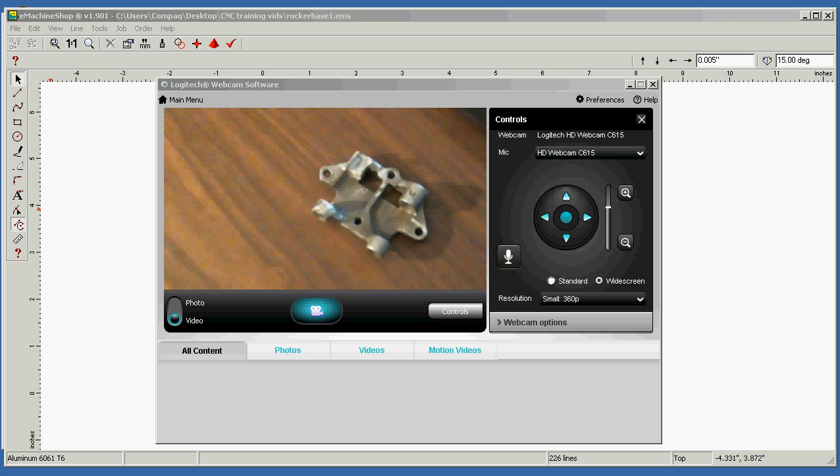Want to get back into the drawing of the drawings I need to do to produce the G code to make this part. Once again, I had to switch computers and operating systems and everything. I love Windows 64-bit, you know, nothing runs in it. So I got another computer now with Windows 7 in it with 32-bit, and hopefully all my software is working good now. I couldn't get D2NC to work correctly in 64-bit Windows 7. So, at any rate, that's my problem.

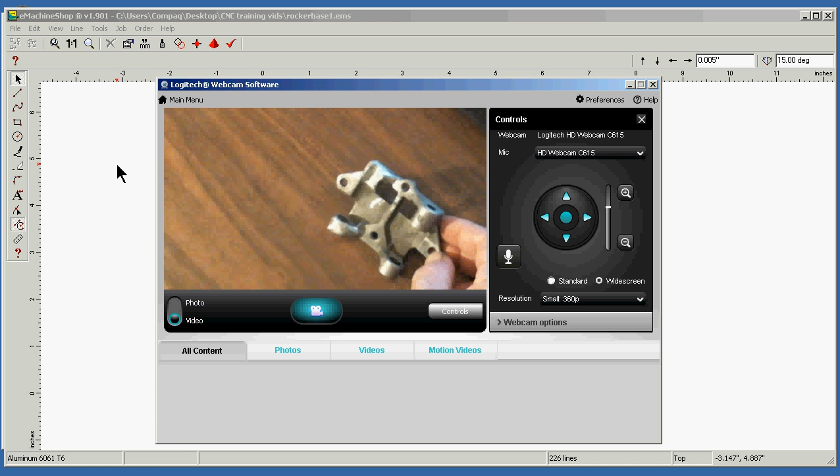What we need to do now is actually determine how we're going to machine the part so we can produce the right drawings to machine the part. There's a few things to keep in mind when we're doing it. One is the tool actually has to travel farther than the distance of the part to cut these things out, otherwise you leave radiuses in the corners. So you can't use the actual drawing of the part to do that.

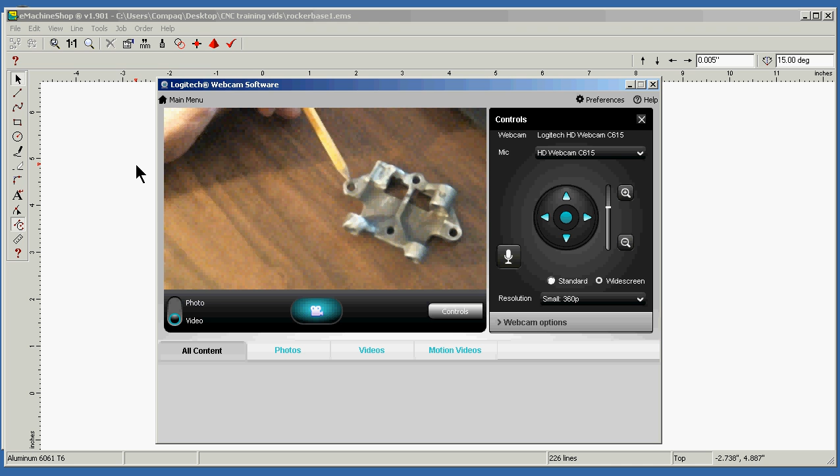The first thing I would want to do is actually drill the bolt hole pattern. The way I've decided to do this is: the first G code I'll do is to find zero, drill the 4 holes so I can make a fixture plate to actually hold this, because I have to keep switching directions and machine it from this way, machine it from this way, machine it from the top, and machine it from the bottom. So the first G code drawing that I'll do is to actually drill the holes. Then once I have that,

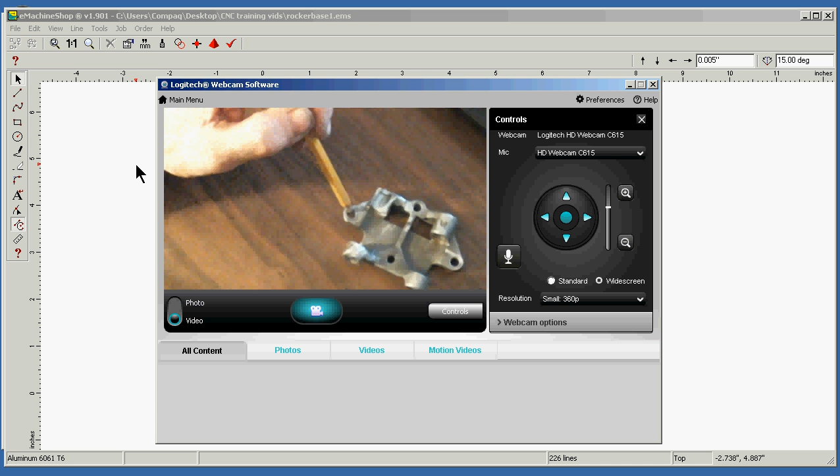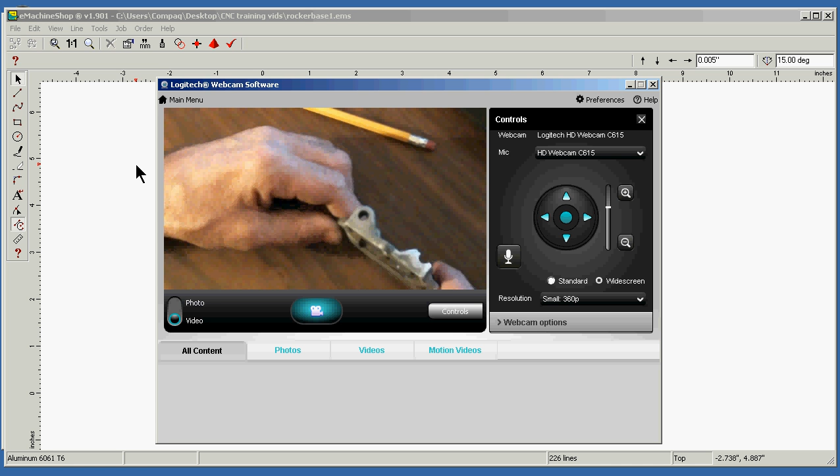I'm going to tap these holes to start with so that I can bring the bolts in from the back side. I have about a quarter inch of thickness here that, if this was bolted down from the back, won't interfere with any of the top machining, and won't interfere with machining it from this side or this side. Then with the same bolt holes and fixture, I'll make 4 standoffs, turn the part around, and then bolt it to the fixture from this direction, and flip it up and machine the back side. So the first G code thing I would do is the bolt pattern.

The second drawing I would need to do, let me see if I can get this back in view here, is to actually come in and take this entire section out this way, all at the same height through here, and I have to go beyond the actual end of the part, so zero will have to be sitting outside the picture, outside the actual part drawing. Otherwise the cutter won't go beyond zero.

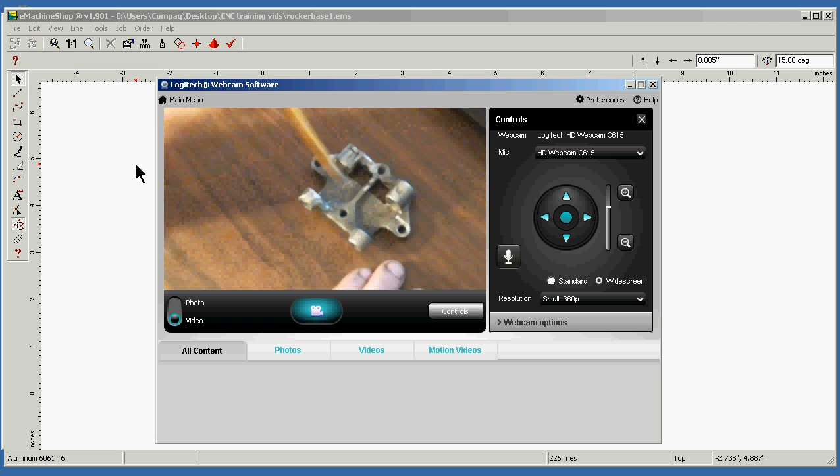Next one is the pass. In that same drawing, the pass will come through here at this depth, so it will take the bulk of the material out of the part in the center going this way and the center going this way.

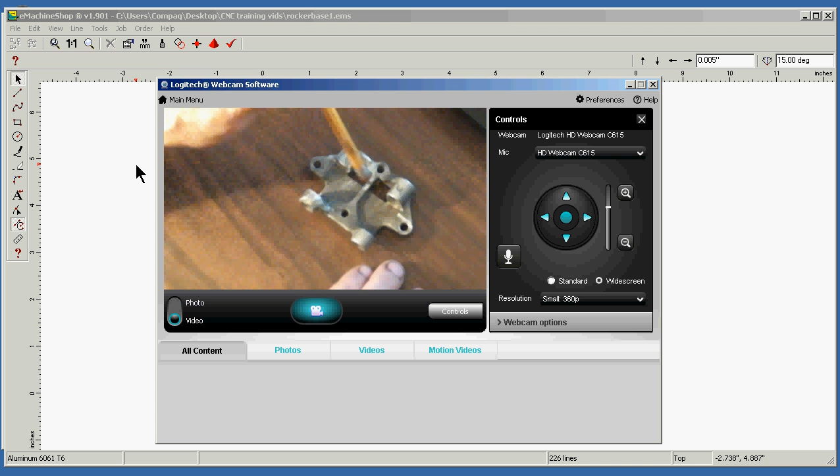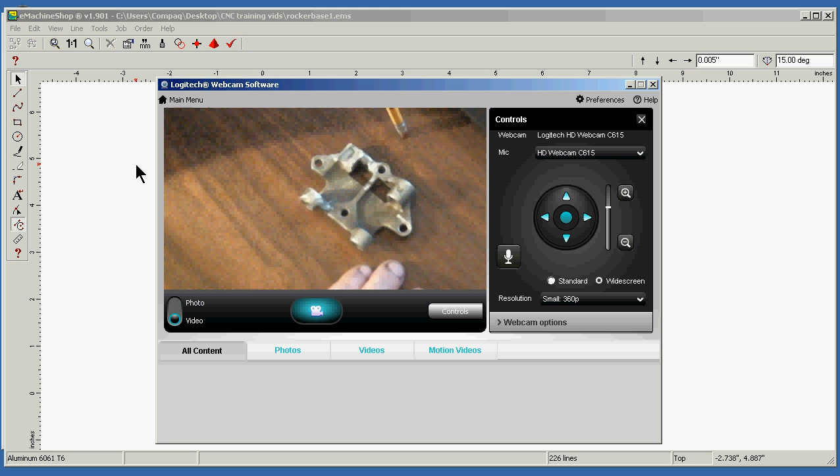Then the next drawing I would do is to produce a G code to take out this pocket, and these 2 holes. At that point, I've got all the geometry for the top surface actually done. These are square, of course, at that point, but they'll round off when we actually stand it up to machine it. So we've taken out the center part, we've taken out the cross part, we've taken out the 2 holes and the 2 pockets. Then, while it's on the fixture plate still, I would stand it up this way.

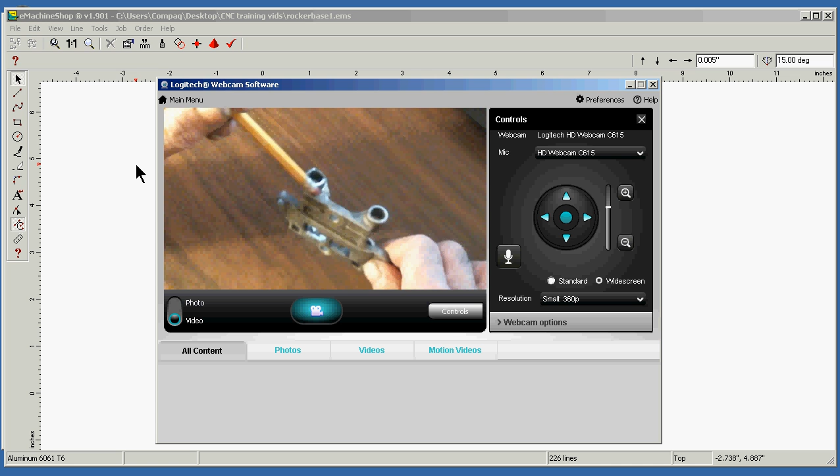Then I need to use this drawing, let me tip it up here. The first drawing, there'll actually be 2 drawings in this one. The first one will take this out to this depth, but this round area actually extends in, as you can see, down in here. So it'll take 2 different drawings to do that, because the first drawing is actually a full complete round circle. The next drawing will follow this contour and come in and go square across the bottom. Hopefully this is making sense.

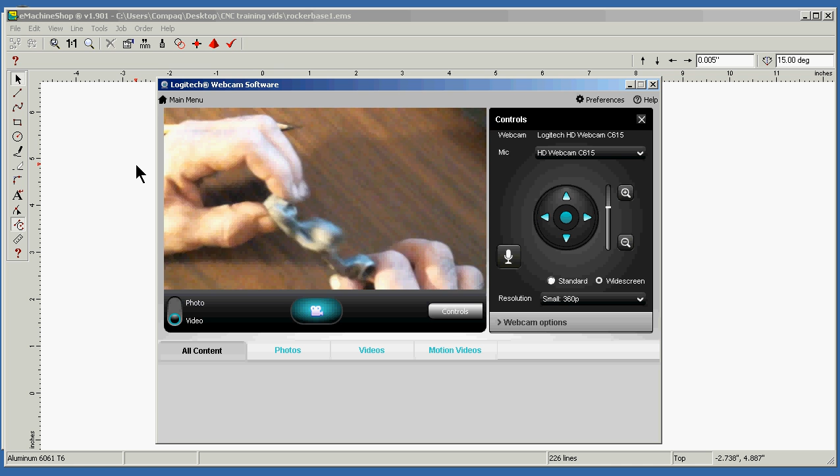Then the next drawing I'll need to do is flipping it over. This one's, once again, two different drawings. This one will have to come into a depth of right here, that's probably hard to see. Oh, there. Depth of right here, to go completely around this.

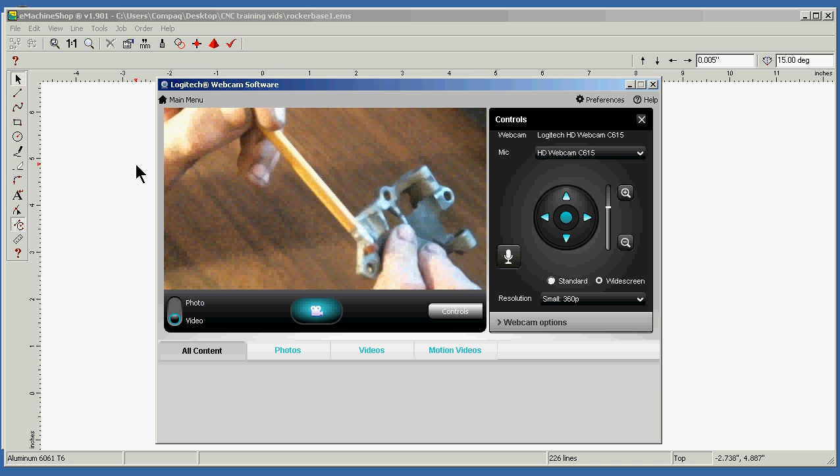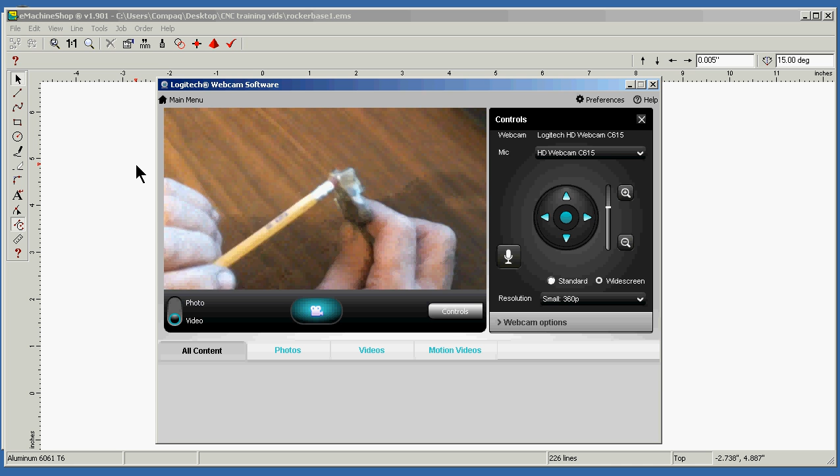Then the next drawing will have to come into a depth here, which means it will have to come around this radius, all the way out, back over, and then across the entire bottom this way, below this level. Because this level, if I can get this right in the cam, extends further than the end of this round section. So there'll be two drawings for this side that have to be set for different depths and different shapes.

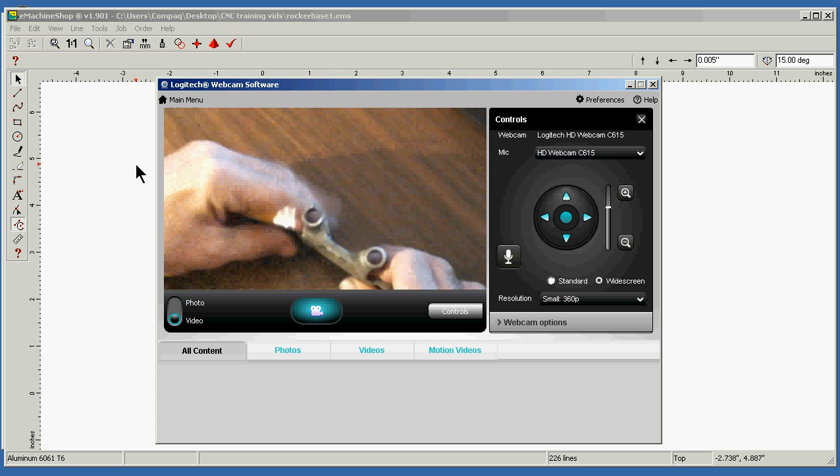Once those three sides are done, now we actually have the rounded surfaces. In this top drawing, I will drill these two holes. I will not try to size them or anything at that point in time.

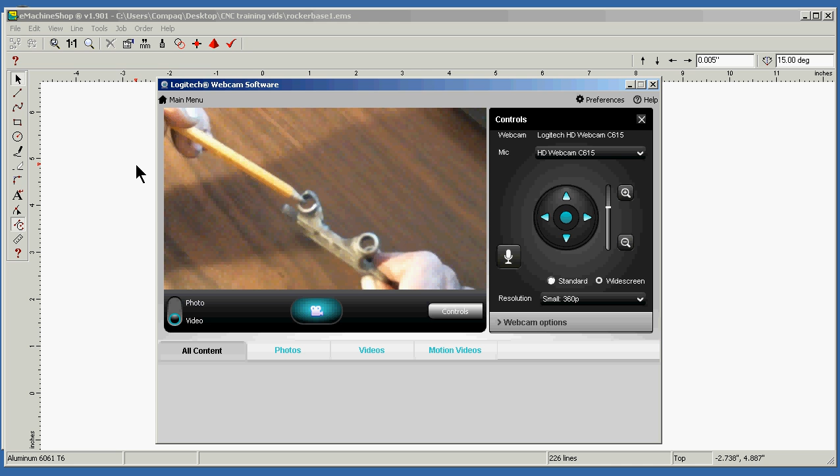I just want to find their location in the drawing, and I'll probably just center drill them. This motor is still put together, so I don't know the exact size of this pin, and that would be something I'd have to do after disassembling the engine, miking the actual pin that goes in there. The original motor used two little tiny C-clips to hold this pin, and the hole is actually smaller on this end, so it just has a flat bottom in it.

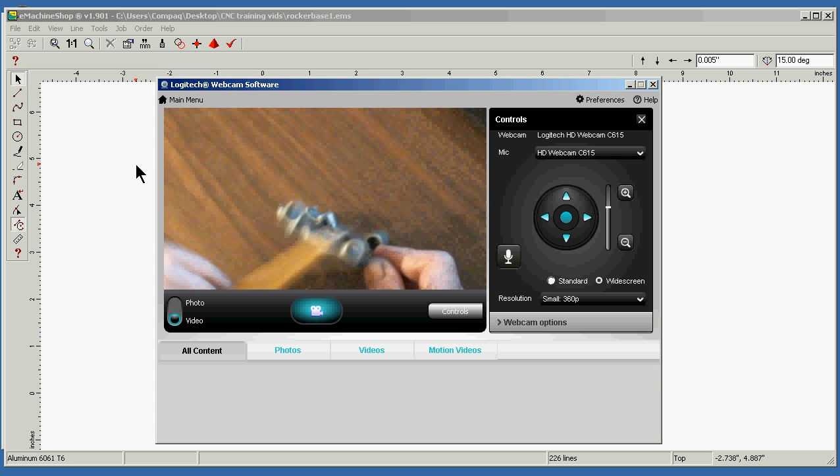I did it differently. It was just easier, instead of cutting this inside snap ring groove, to drill from the top and put roll pins in it. It's just something to keep this from moving back and forth. So it's easier to just put a roll pin here and a roll pin here and ream straight through.

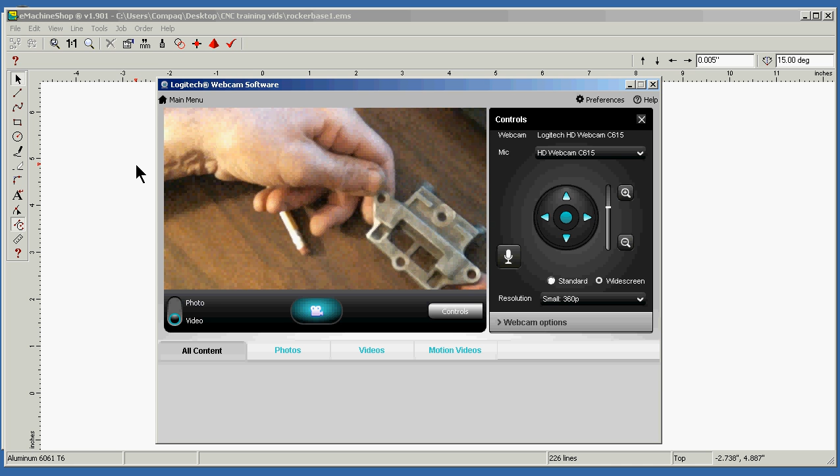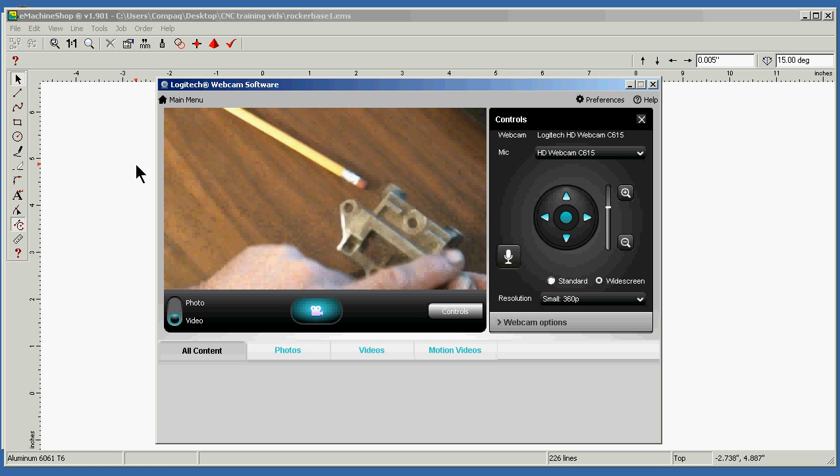As far as the bottom, once that's completely done, this will go back on the fixture plate. I'll make 4 standoffs, or I can just make an X-shaped block with 4 holes through it that's perfectly level, bolted to the fixture plate from the bottom. It has to bolt from the bottom because I need to machine the surface, so I can't have bolts here. Then all of the rest of these shapes will be milled into the bottom, and it's completed.

So let's start with the first set of drawings. One of the things I'll show you in the drawing is that I need to move my 0,0 point in all of these.

The reason I want to move it in all of them is, if you watch the previous videos, to do the G-code for the drill locations where it steps and goes to the next point, the next point, the next point, you have to have your first circle with its center where this square would be.

If you don't, the software, when it's set to only look at circles for drilling, will probably pick this circle right here as its starting point, choosing either the lowest or the farthest to the left. One of these two circles it's going to pick as a starting point, and that's not 0,0.

So that drawing will have to have a circle right here. I put these in since the last video. I realized I was changing things, and I wanted to mention that these are the actual 0,0 points on this drawing. This one here is actually in the wrong position, because you always want 0 from the original starting point.

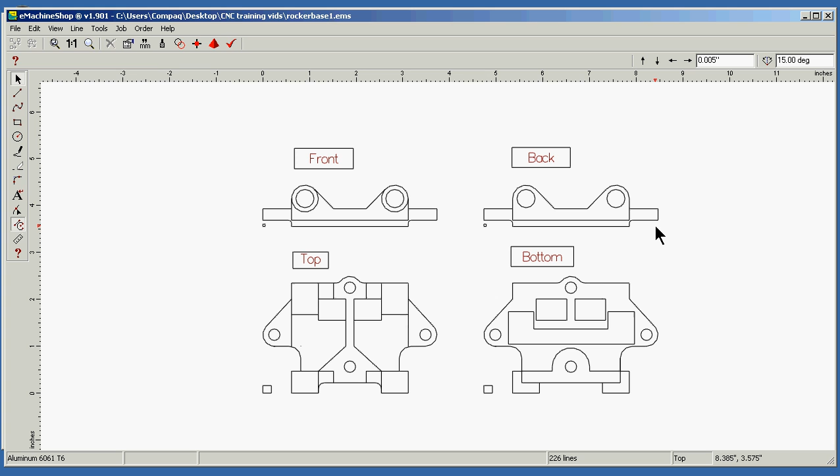This view here actually is correct. Its 0 point will start here, same as this one. But this one, when we flip it over, our original 0 point for X and Y is over here. So I'll need to move these two so that I'm always starting from the same 0 point.

So I'll go ahead and do that first. Let's select the area here and then zoom to the area. Zoom to selection. Alright, click off of it. And I'm going to draw a line from here, holding down the control key.

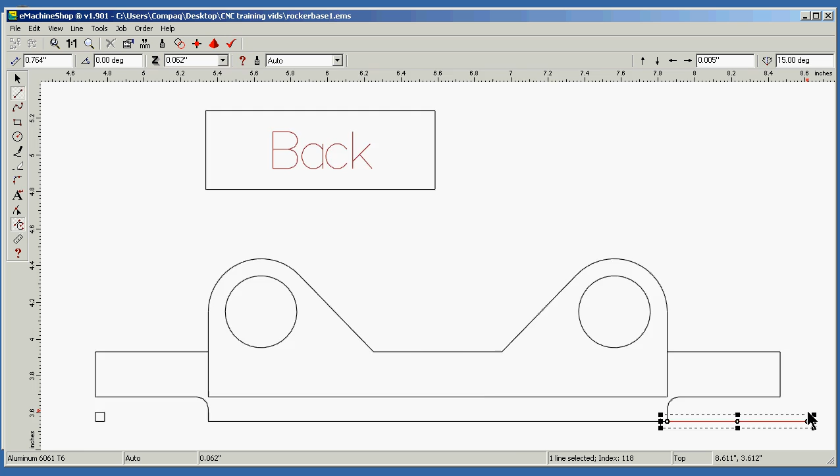I got a new keyboard too, so I have to find out where the keys are. I'm going to hold down the control key so the line stays straight, just pass through here and drop it. Same thing, I'm going to pick this one up at the top here.

Start there, holding the control key, and just drawing those two lines. Pick this little square here and bring it a little closer into view, then drop it in this section.

I'm going to zoom to the actual little square there. I want to select an area and then zoom to that, so we're going to say view, zoom to selection. I want to grab this.

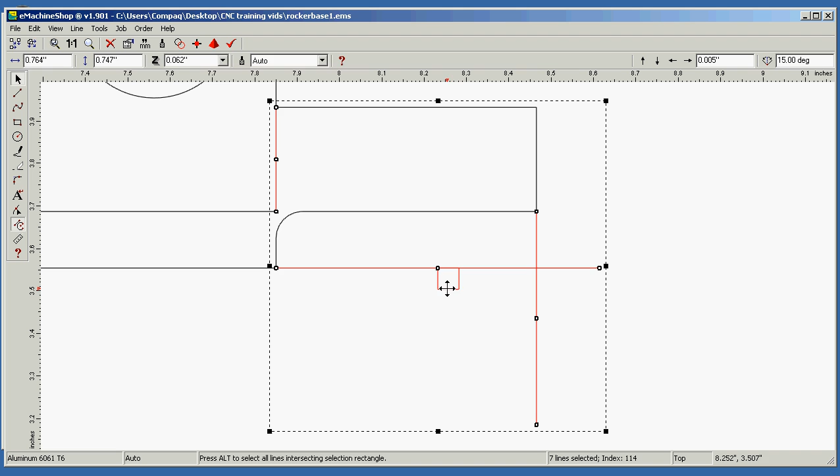Grab this little square and bring it over here and snap it in, then select these two lines and delete them. So we move that, same thing over here. I'm using dual screen now to try to get some of the clutter off and make the view bigger.

I got to hold the control key, snap to location, draw the cross line. Grab this box, and then delete these two lines off.

So our 0 points, even when we flip it, are always going to be from where we started from, and that'll help keep things accurate and lined up. If you started from the other end, discrepancies in the machine, your lead screws, can show up in the part. So you always want to start from the same 0.

So we're going to do the first drawing, and to do that, I'm just going to copy this one here. Right click and say copy. I'm going to right click on the screen, say paste.

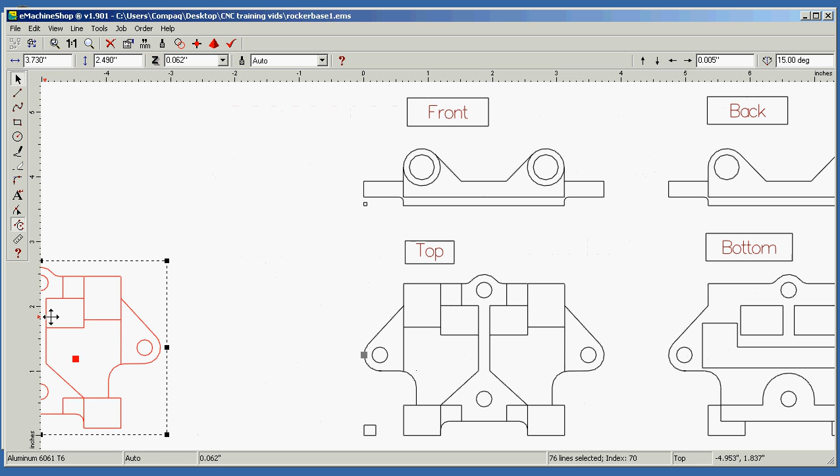I've got a box that keeps popping up here, I need to move over. It's on the other screen. That's fine, I'm going to move this just over the side here.

It don't really have to line up with anything. I'm going to shut this warning off, everybody's already seen the warnings.

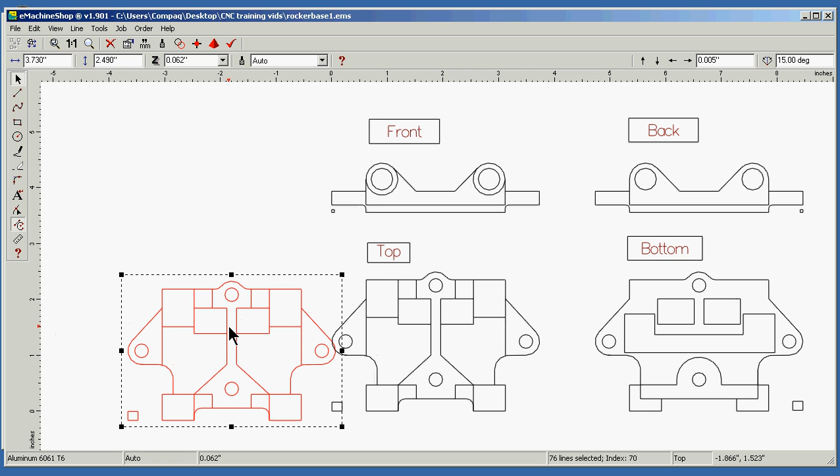Now this drawing, I want to select it again, ungroup it. Click off of it, and I need to draw a small circle, just a reference point for the drilling. I want to drop this circle so that the center of it is at this 0 point on this XY coordinate here, so if I can get in there.

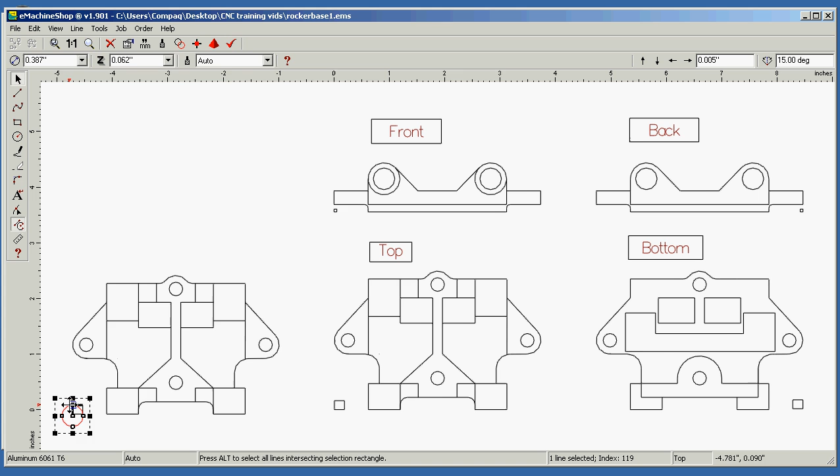I'm just going to click on the box and zoom to it so I'm sure that I'm actually dead center on that, or all my bolt holes will be off. Zoom to selection, zoom out a little bit.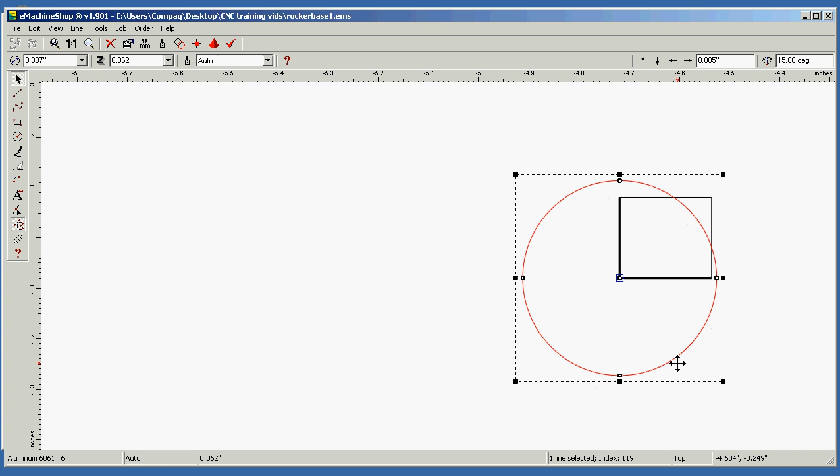Grab this circle and move it up to there, zeroing it on that point. Then I want to select the square and delete it out. Find the right key here.

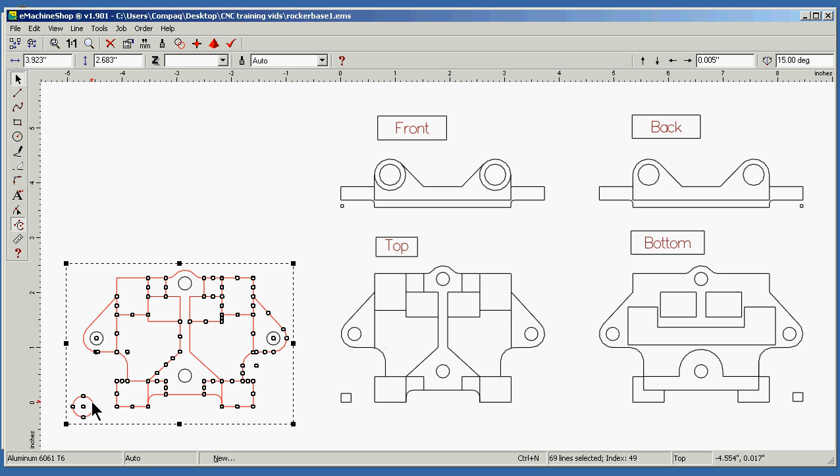Okay, now we want to select everything here, and then holding down the control key, pick the items we want to keep. I want to keep the 4 drill points and this alignment circle, and everything else I want to delete. So there's our drill bolt hole pattern.

We'll go ahead and group these, grab them all, say line and group. Okay, there's our first pattern for this top view.

Now we want to once again just right click on the screens. It's going to drop it right here. I could say 3 inches away or 2 inches away here, and it'll drop it somewhere else. But say right click and paste, and we need another view of it. It still dropped it there.

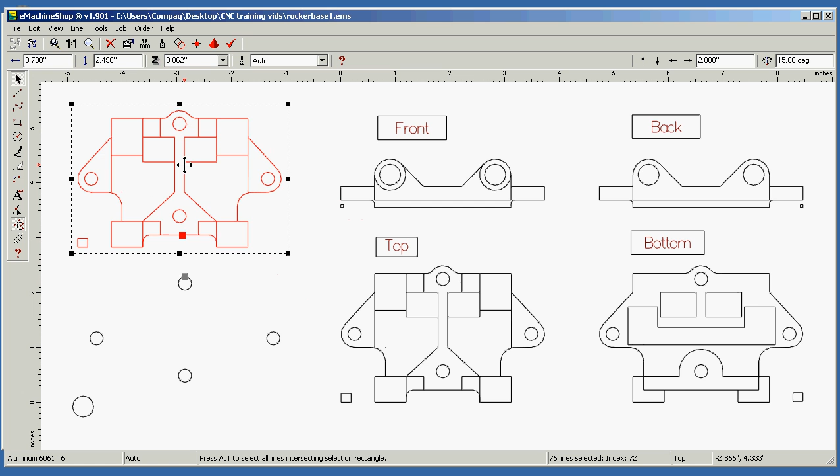Sometimes this stuff's a little quirky. I actually want to bring it over here further, try to keep the views of what piece I'm working for aligned. So we'll drop it there.

With this one, I need to draw this a little different, and when I set this one down, I need this cutter to go farther than the 0, 0 point so that it does not leave round radiuses.

Now, looking at it, I don't believe it's going to. I may not have to do that.

The 0 point is going to cross here, so the radius from the cutter would be where my arrow is. The radius from the cutter here would be where my arrow is. This one will be where the arrow is, and here.

So what I'm going to do is ungroup the lower drawing without the square. So I'll select this. I'm going to click ungroup.

I want to select it all again. I'm thinking my way through this. Holding down the control key, I want to click on what I want to keep as reference points, and get rid of all the rest of the clutter. We're just going to make a T here for a tool path.

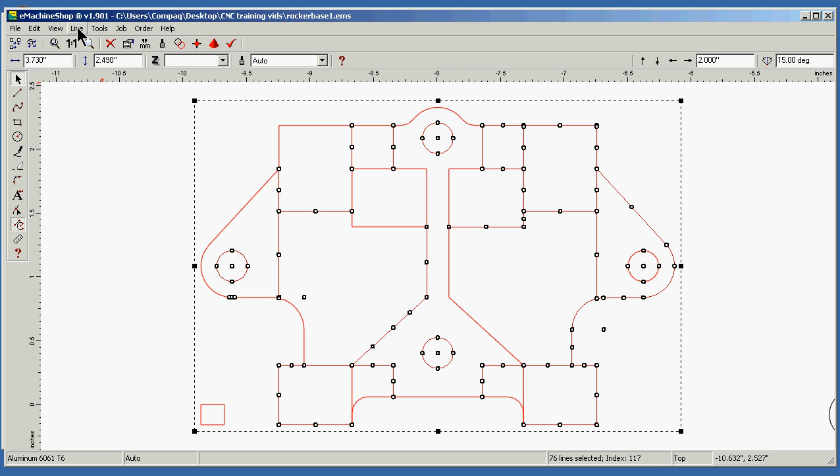Everything's ungrouped, so I'm going to say line intersect, so I can take out individual pieces. Now I want to take out - I'm going to have a path through here, come down, back through here, up, and then I've got a path through here. It's going to come here, move over, through here, back, down through to here, back, back up.

The same over here. That'll take out all but just this little radius right here above these two holes we're going to do. That means these two holes will actually have to start from the top surface instead of starting from this surface - they'll have to start from this height. It'll make sense when I actually start making the G code.

So to select these lines, what I want to do is draw a line from here to here and bring it down here and snap it to the center. That's not going to work - I don't want to just drop it. So we'll go back to plan A. I'm going to delete this out. I'll extend the lines later.

I'm going to draw a box around the whole part, I believe. So draw from here to here. Draw a line from the very top to the center of this. Does that look right? Okay, I need that distance.

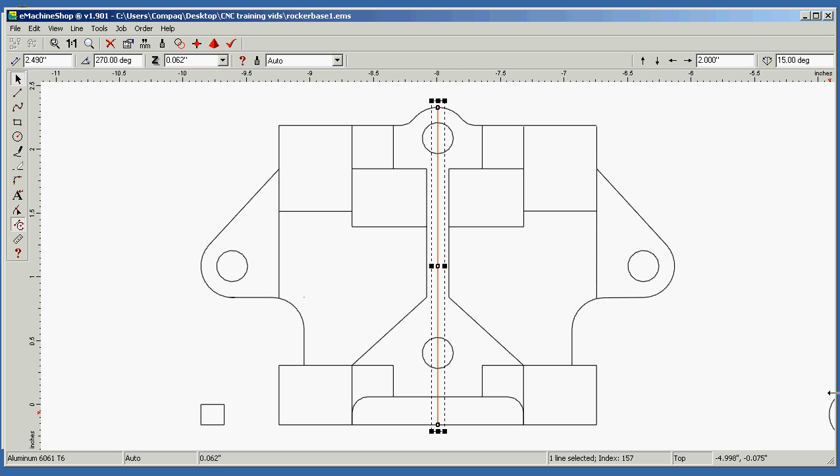I need a line from the total width. I'm just using this to measure - I could have used the measuring tool, I should get used to using that, and it would have stayed on screen. So I just want to draw a box around the whole thing, starting in this square.

And then put in these dimensions. My X is 3.730, so on my box I'll make the X 3.370.

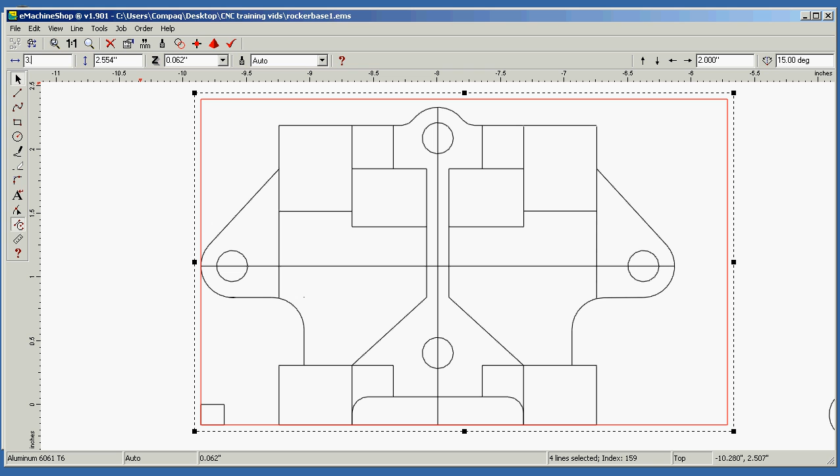That's wrong, click on this line again. That line is 3.730 - what did I make this one? 3.730. A little better. Okay, this one here is 2.490. 2.490.

Put it in the wrong spot. 2.490.

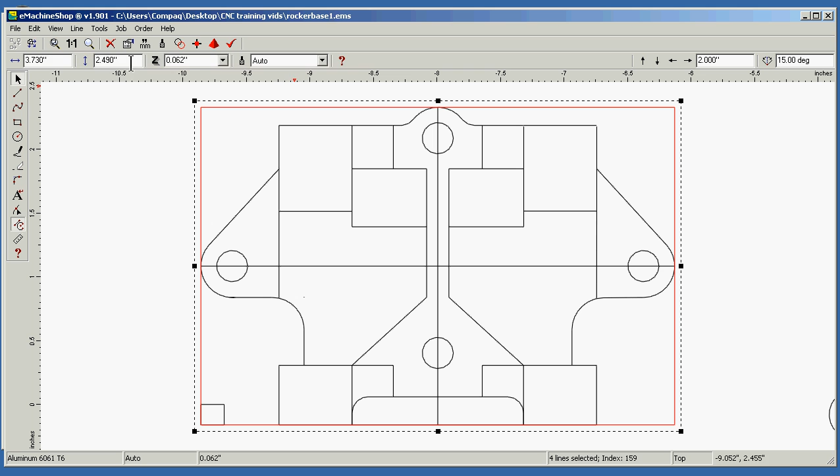Alright, so we have a box that shows the outside dimensions, and we can start deleting some things off. I'm going to start drawing the T by - let's go ahead and just start deleting things out of here. These are already intersected, I don't need this line. I don't need this line.

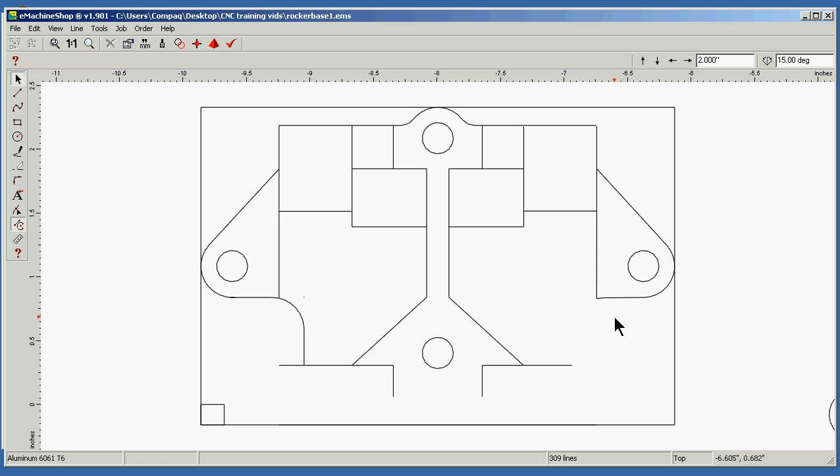Have to make sure you come back when you get your drawing done and group it, and look to see if you got any extra little lines sitting around. I want to keep the tip of this radius right here because the center of it is going to be - yeah, I want to leave that one. Delete this. Let's just do it the right way - select the actual line, get that little tiny one. I no longer need this circle.

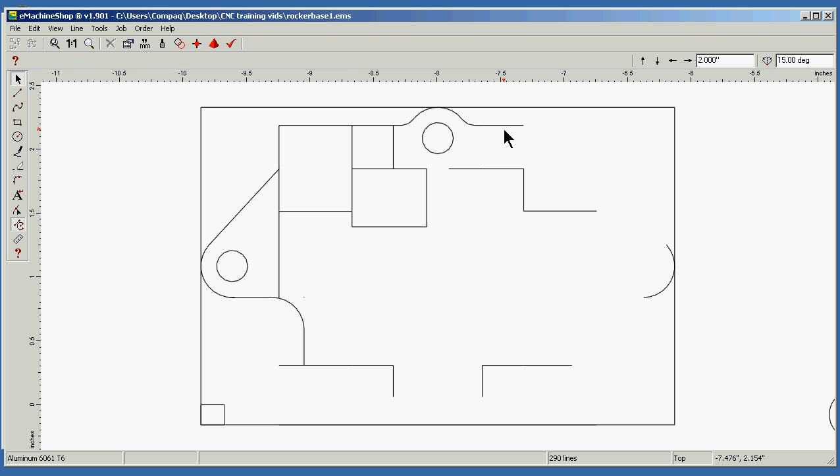Oh, took out a line I needed. Messing up. Alright, I needed that line. Like this. This.

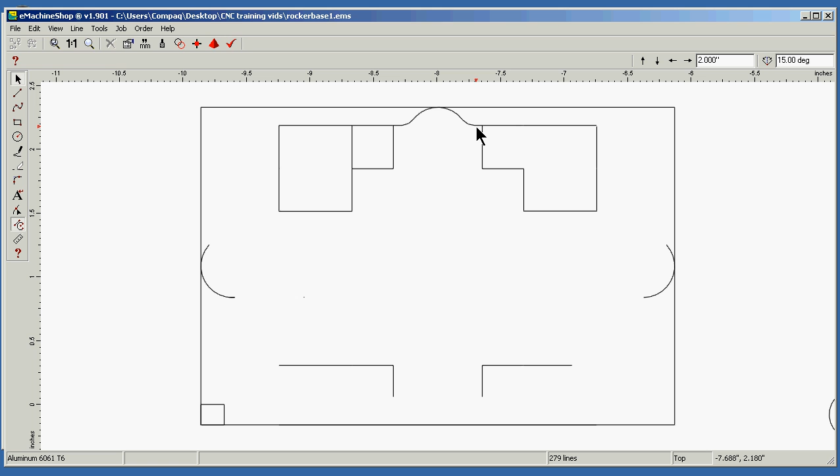So, make sense in a minute. I just need to get all these extra lines out of here because we're not using the drawing for anything except for a toolpath.

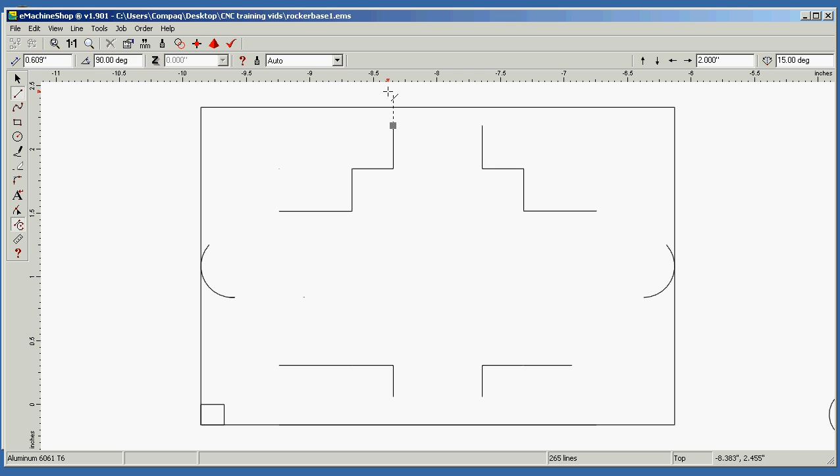Alright, let's see. Now what I need to do is carry this line through here to the top. Hold down my control key so it's straight - otherwise, see how it snaps 15 degrees each time. I want to carry - you can hit your space bar, hold down the control key, come through the top.

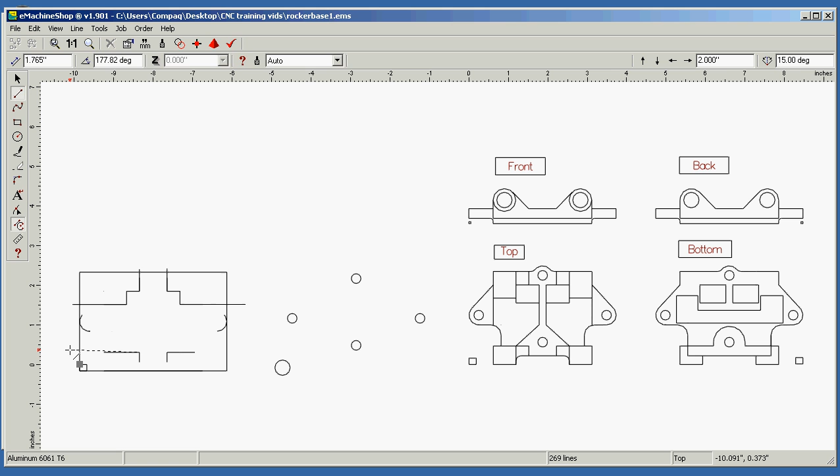I didn't want to zoom out, but that's alright. Come here, do the same thing. A little hard to see, but - creature of habit, I don't hit the space bar, I forgot to drop it. Come through.

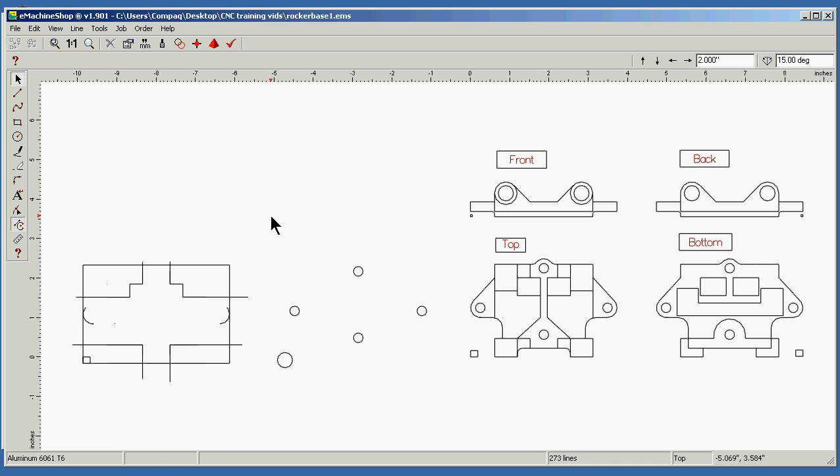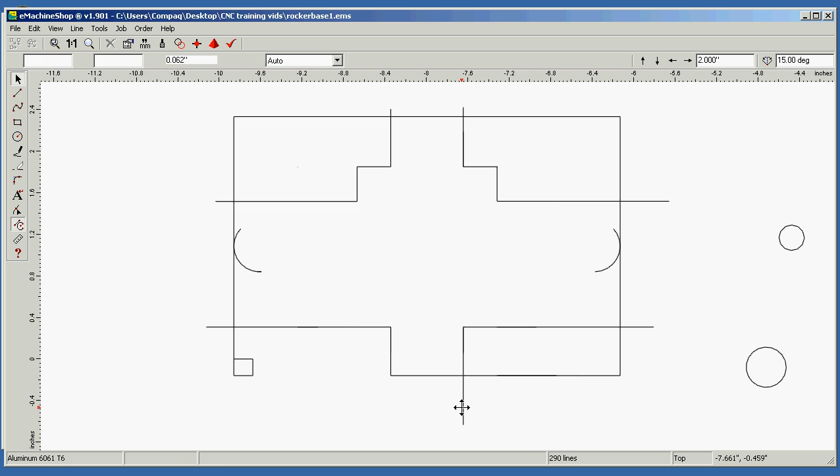I can select this all again and zoom to the view. Now while that's selected, I want to intersect all these lines and delete out of here what I don't need. I'm not going to need this line, this line. A little fragment there.

There's a little dot there. Got him. That's the wrong selection. Can't leave any little dots in your closed shape, you need a closed shape.

All right, we're going to select that shape. That's the actual tool path we're going to use to cut that whole inside section out. We're going to select that shape, holding the control key, select the block out of here. I'm going to do an edit undo in case I moved something.

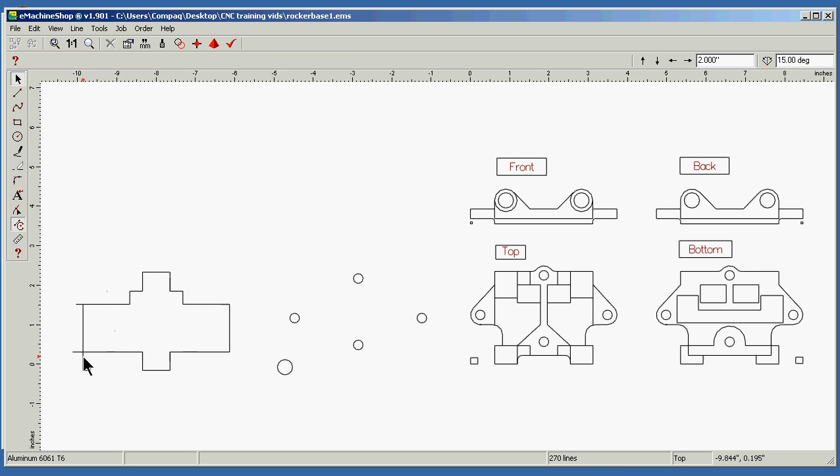Alright, go back and start deleting these out. Had to do that because I think I moved the little square down there and that would have thrown me off. Okay, now I'm going to select all these again.

Holding the control key down, I want to select this box without moving it. I'll select the box first, group it. Then I want to select the whole thing and group it, so it'll quit falling apart if I have to move it.

Alright, let's take this into D2NC and we can see if we have any errors in it. This actually would be step 2, because step 1 is going to be the drilling one. But I'm going to pause here for just a second and then I'll come back.

Trying to find my... doing something wrong, I'm not sure if this paused. Give me just a minute.

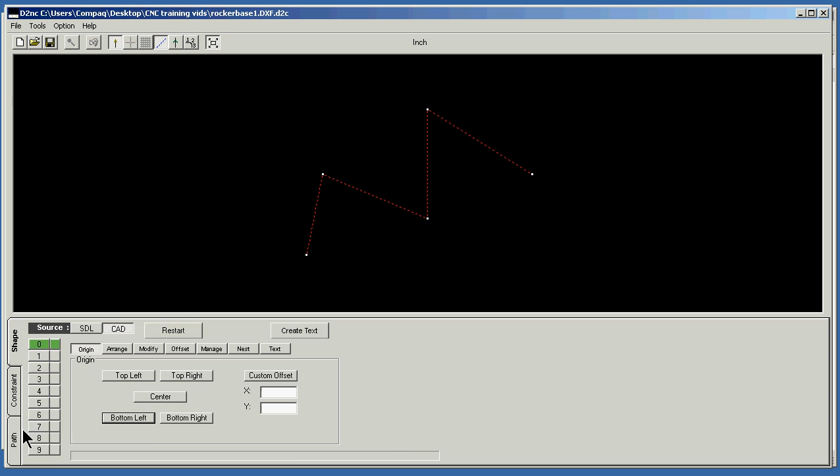Now we need to click on path. Instead of going to contour, where there's nothing to contour here, we're going to tell it to go to the position and then pause and sit there. And then I can have the CNC move to each location and just drill the hole with the milling machine. Just unlock the spindle and pull a handle and drill each hole, or tap it, whatever I want to do at that point.

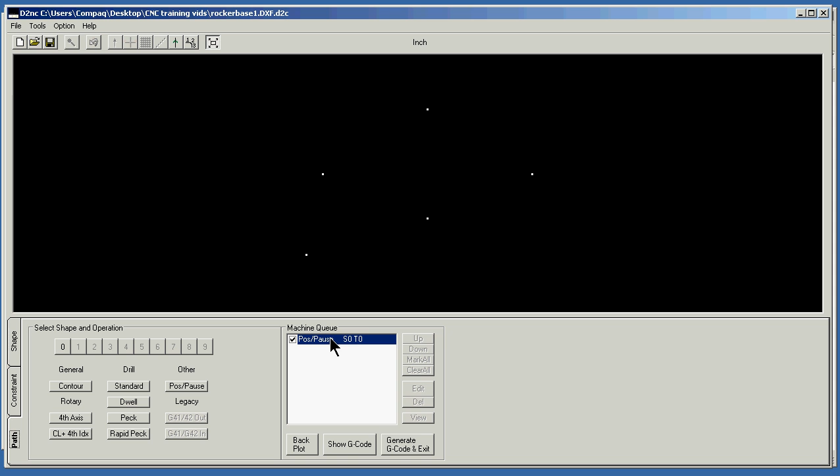So we've already got our drawing here. Just generate the G code and it'll take us into Mach 3. And then I'll go to toolpath so you can see it. Zoom in.

And here's 0 point. If you click on the screen to check your G code, you can watch line for line what the machine's going to do. So we'll start out here. As I'm going down, these are just the notes and tool change. Right now it's starting at 0, 0. And it will take us, okay.

It wasn't zeroed. See up here? So we're going to rewind it. We're going to run from here. I need to zero the machine before I start. Go back to screen. Zero the machine, so it's actually going to start at 0.

This will be a little better. Okay, so now we're actually at our 0, 0 point. I click on the screen and I can go through my code one line at a time. Everything that's in parentheses is not code. So there's the first one. And if you look down in the corner carefully, you can see it flash.

There's our first location. We'll drill and tap. Goes to the next location, drill and tap. Next location, drill and tap. Next location, drill and tap. And then back to 0. That's the end of the first one.

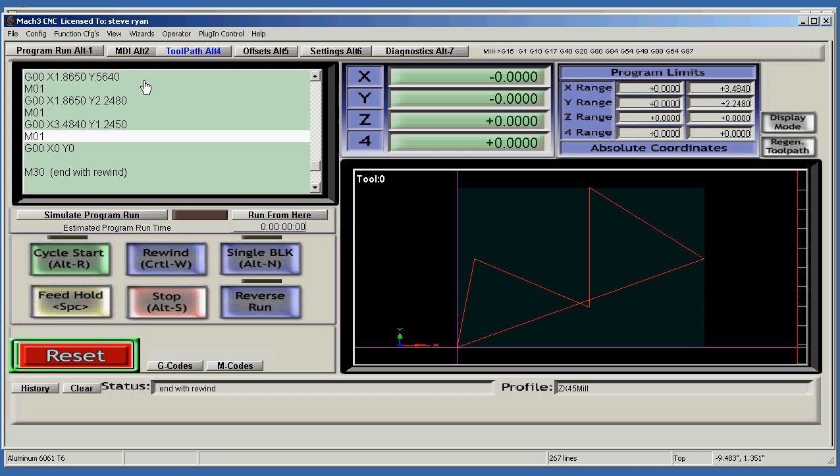Now, D2NC sends it to Mach 3 named D2NC.tap. If you don't want to lose that actual file we just created, the first G code, you have to edit it and rename it. So we have the G code already for step 1. So we're going to edit the G code. I have to pull this over into the screen so you can see it.

There's no reason to change it. We can put all these together after we make them all, but first thing we want to do is save it as. I want to make sure it's saving it to my desktop, which it's not. Let's put it in the desktop in the right folder this time.

Then we see it's already named D2NC tap. Well, the next file we make is going to come over named D2NC tap 2. So we want to name it step 1. Be fine.

Drill. And I would actually, most of the time, I don't know what size drill bit this is going to be. I got to go back and look and see what size the hole is and tap it and use screws that are going to be smaller than my final hole dimension. But I would put a drill size there. I'm just going to put 0.2 as an example so that it makes it a little easier to understand, and say save.

Now if I come out of here and unload, close the G code, now to get back to that actual G code, I can click load G code, tell it where it's at, which it's, go to desktop. It'll remember it once you did this once. None of the software has been run on this computer. CNC training vids, and here's our file. So we have our first G code made.

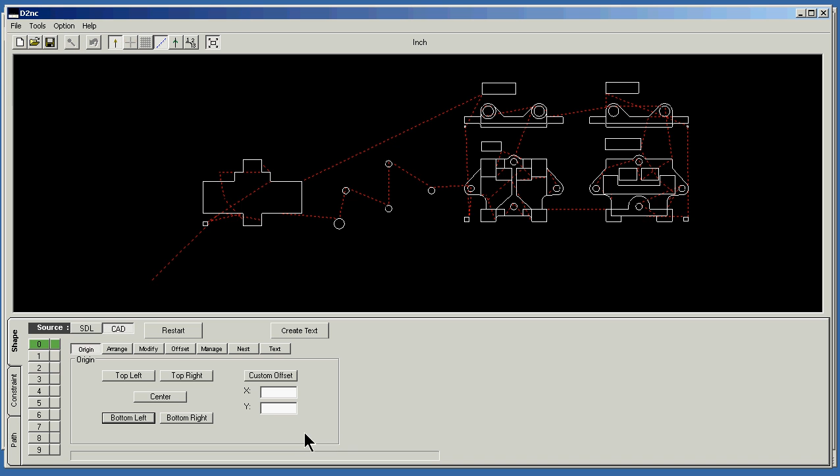From this point on, we just click next on the first drawing. Don't worry about anything except for modifying it first. The only drawing we need is this one here. So we're just going to hold down our left mouse button, select everything else on the screen, and delete it. It does not delete it from your drawing, it just deletes it from the view here.

Remove selection. Then we're going to set its point of origin to bottom left. We're going to do an offset. And it's asking for a tool diameter. Let's just do a pocket and do it as 0.5.

Keep things from getting confusing. You can play with the software and learn how to use it differently in the future. This is not highlighted yellow, so I think I have a problem here.

We'll try it. Yeah, see, this is a series of lines. See all these lines running around through here? We have lines on lines here. So this is an error that'll come up with your drawing. And when you see this, if your closed-in area is not actually yellow and you see all these red paths, that means you definitely got a problem.

With your drawing. So what we want to do at this point is just close this out. This was an example I wanted to show you so you understand what's happening when you see crazy stuff on the screen. And if we zoom into this area, because I kept drawing over the top of things, there's lines underneath it, and these lines are not actually intersected.

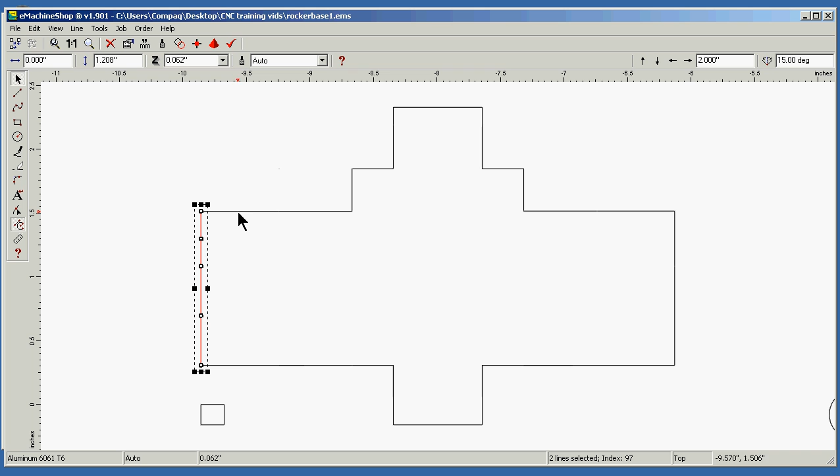We're going to group them, move them out of the way, delete everything that's underneath them, and put them back. That way we don't pick up any extra lines, dots, little pieces.

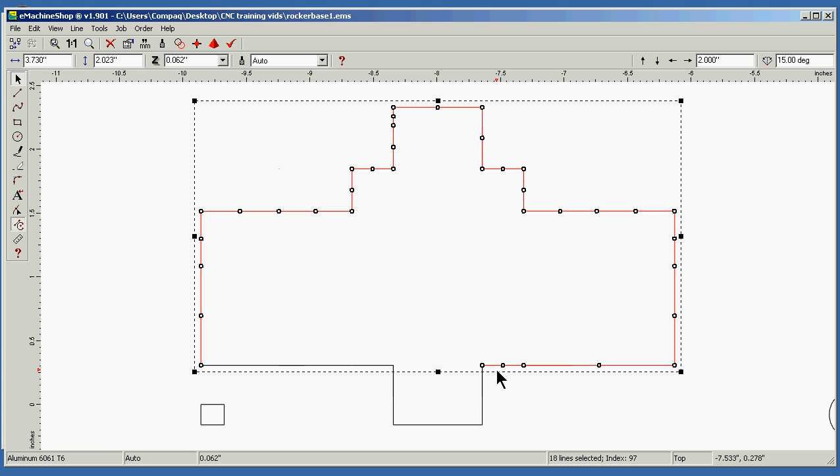I'm going to do it with the cut and paste. Okay. Let's say line group. We're not going to cut and paste it. We'll just drag it out of there.

Now, see what we got underneath here? That's why the thing was going crazy. So we need to actually select those lines without moving that square. Delete them out of there.

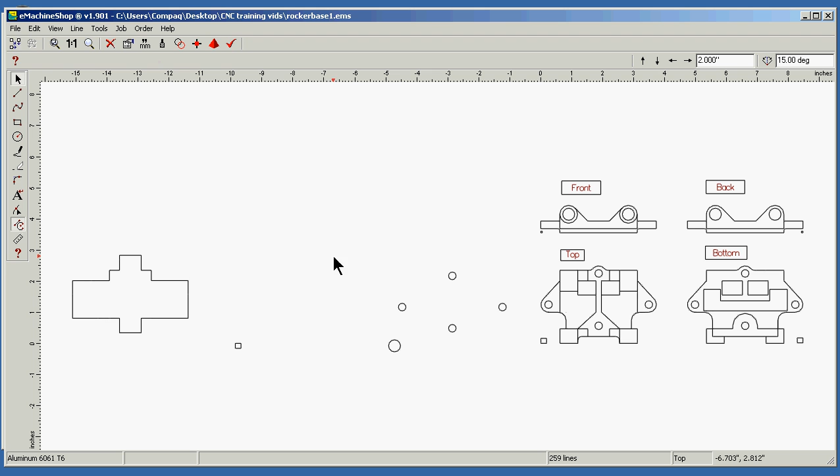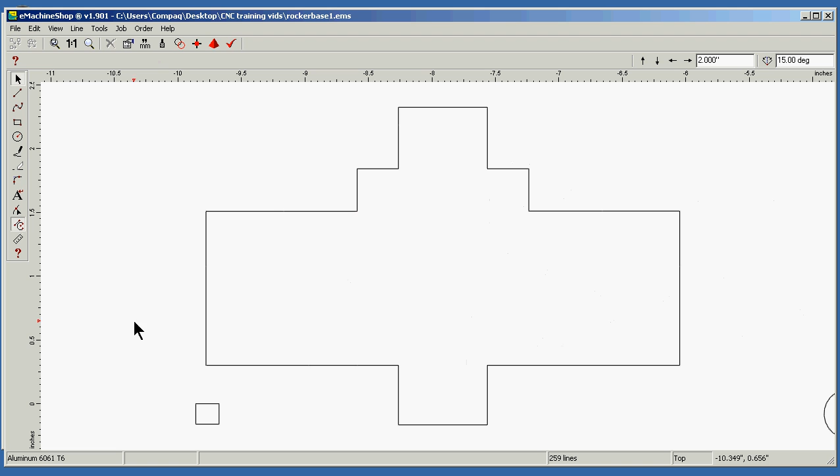And relocate our part in here. Now to do this, I'm going to have to zoom in on the area. Zoom to selection. Okay, we need to reline this up. So I'm just going to draw a box starting at this point. Make sure it's bigger than our part.

Grab our part that we grouped, and it should snap right into location. It's not. It's actually up higher here. It's because I didn't tell it the height of this box.

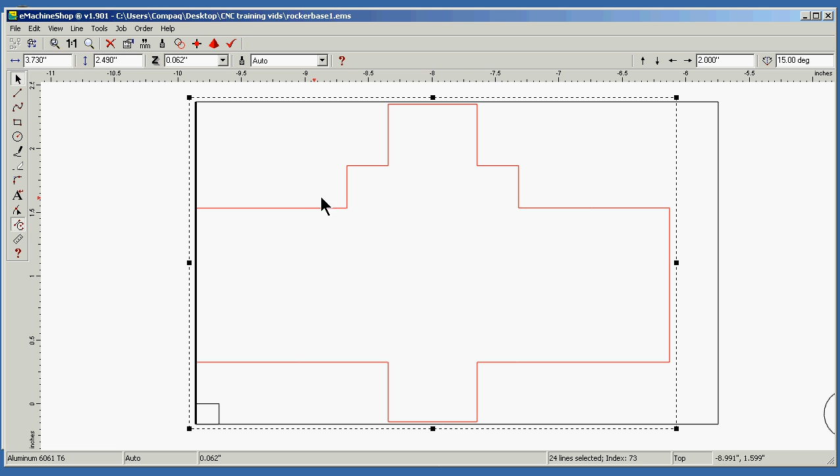Okay, this box that's highlighted right now is 2.490. Select the other box. Make it 2.490 tall. Okay, now I can grab this and it'll snap right into location. Delete the outer box.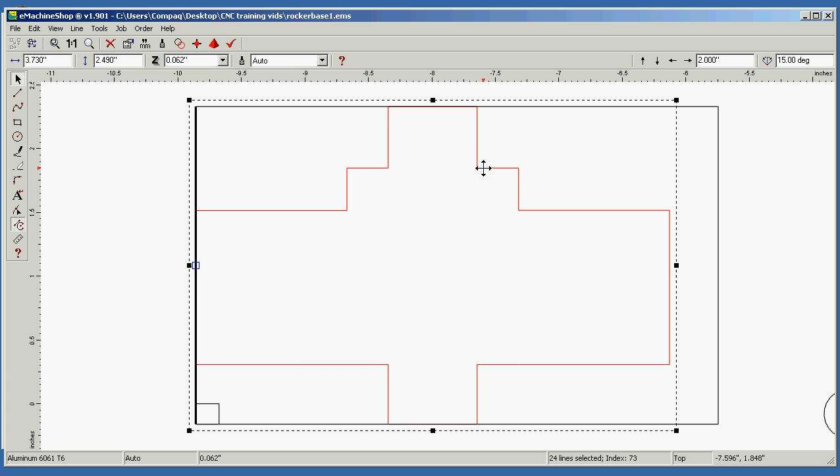Save this. Export this.

These are things, if you watch the training videos from the company that actually makes the software, the guy that's doing that isn't going to make a mistake. So you don't learn what to do when there's a mistake. So actually having somebody that screws up isn't such a bad way to learn something.

So let's go back into Mach 3, go back into D2NC, and I'll show you what difference it's made. Don't select the same drawing. You can if you want, but I always just start clean. I don't know why, creature of habit. Reopen it. Going to click next and delete off everything we're not working with.

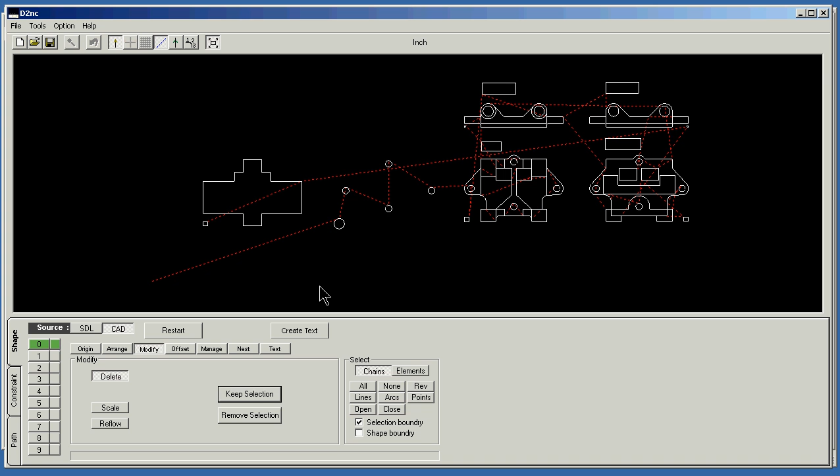You have to click on modify to do that. Select everything we're not working with. Make sure you scroll around and really select everything on the screen.

Remove it. Now if you notice, we have two lines. One's going to a closed shape here, which is our entire path. The other's coming back to a closed shape here, and we don't have all the rest of those red lines, so we have no errors in our drawing. Now, while that's selected, we want to tell it its origins, bottom left. That's where our square is.

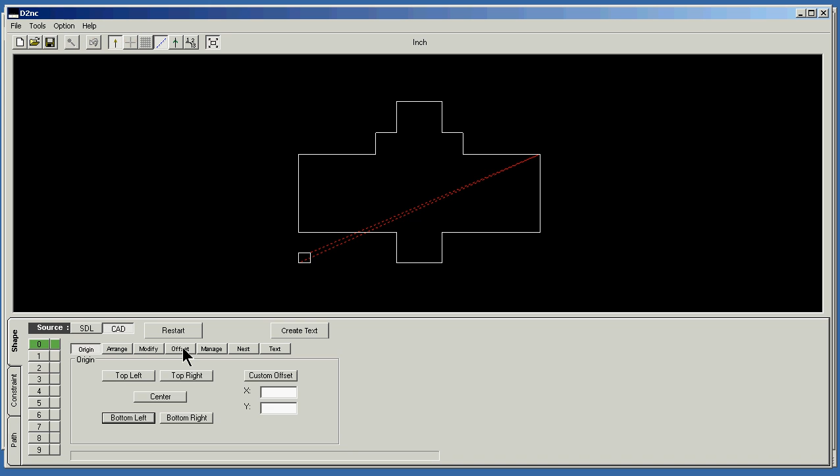Now that we've moved it there, we can tell it the offset and the tool size, which is going to be 0.5. We're going to use a 1/2 inch, and pocket the inside. Notice this is yellow, meaning there's no errors. Those are all connected lines, one steady group, so we select that.

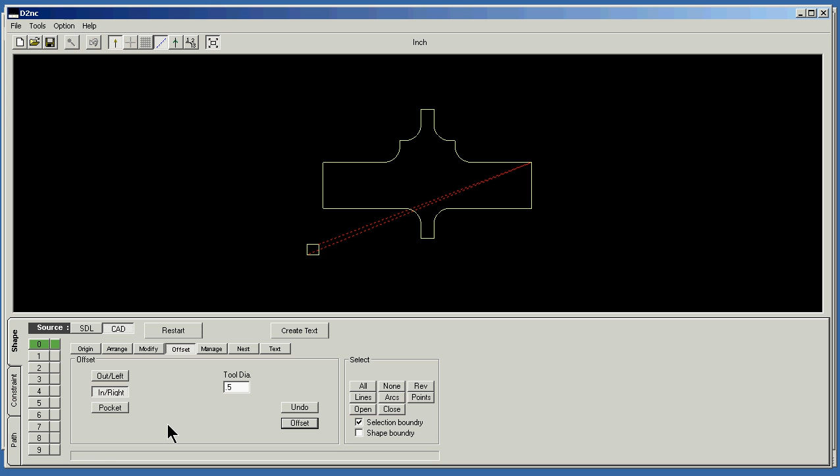We're going to offset it. That changes the offset of the tool. We can go to path, contour, local shape, none. Select the path we're working with, and move that in to say what we're going to do with it. Right now we need to know the depth of this cut.

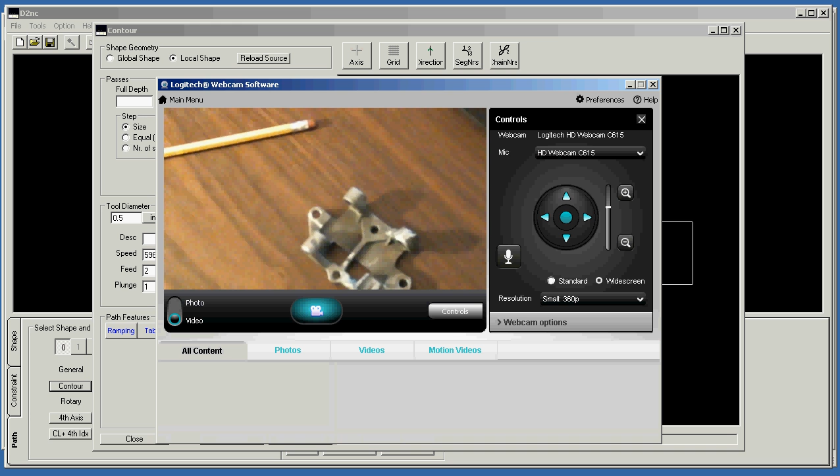So I'm going to switch back to camera mode, if I can find a camera. The depth of this cut below this surface right here, we're going from here to here. The way we'll find that is in the drawing. Go back to eMachine Shop, and hit equals to find our normal view.

The depth of this cut can be found by measuring from the top here to right here, and that is 0.504. So going back to D2NC, full depth below 0, where 0 is the top of the part, is 0.504.

I'm going to take 20 thousandths per step. D2NC is really good about this — if you go into constraint and set the actual material you're working with, it'll give you a very conservative feed and speed. I'm just going to accept all these as what it is.

I only took a 20 thousandth step on a 1/2 inch cutter because, on the speed, I would crank this up to 2200 right now and run my feed at about 15. But that's my machine, with cooling on — that's the way I would do it. D2NC will give you the conservative feeds and speeds.

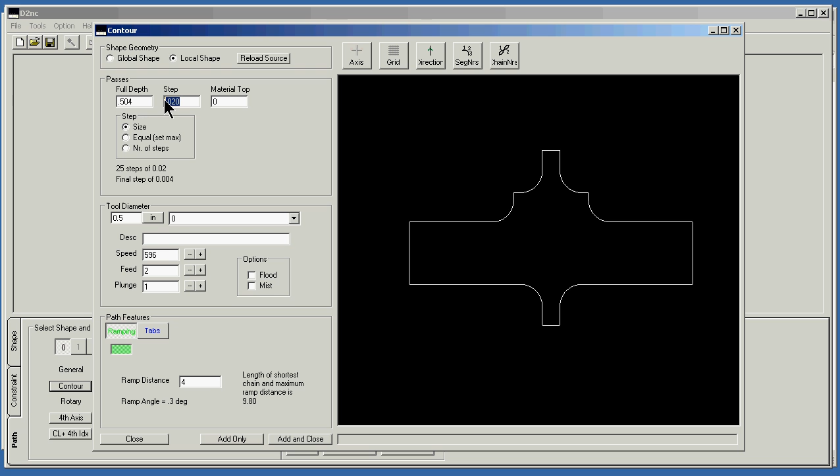Actually, I'm going to change this step so it shows up in the actual graphics. I'm going to change that to 0.50, just for graphic representation. I'm going to go ahead and add and close.

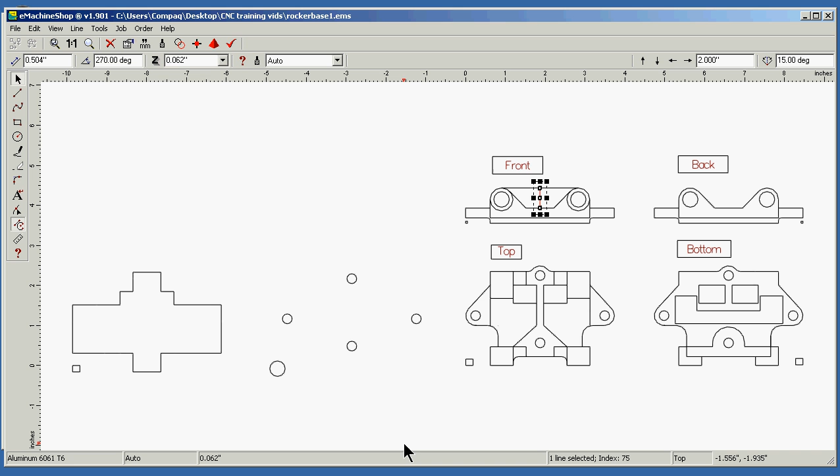So now we have step 2 of our G code, and I can go ahead and generate that. Go back to Mach 3 and we can take a look at that. Here's the tool path — you have to always regenerate when you go to tool path. That's Mach 3 saving.

So there's our first tool path. That's going to take out all that material in the center.

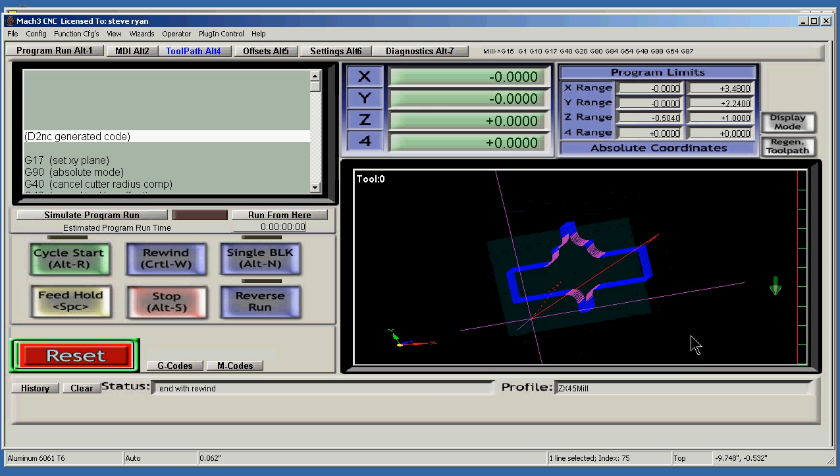Now I want to go back to our drawing. Well, see, this is where I mess up — I don't want to go back to the drawing yet. I want to edit the G code.

File, save as, go down here. Make sure you leave the .tap on there, or it'll make a text file out of it and it'll say .text. And if you come back here, see, it's trying to put it in Mach 3 G code. Hang on just a second — I want it on my desktop. It didn't remember that.

Okay, and it's D2NC.tap. We're going to change this to step, dash, 2, dash, and then I put the cutter size — that was a 1/2 inch cutter. Save, and then we can go ahead and close this. Now if we go to load, we'll find step 2 with a 1/2 inch cutter, and we can hit cancel here.

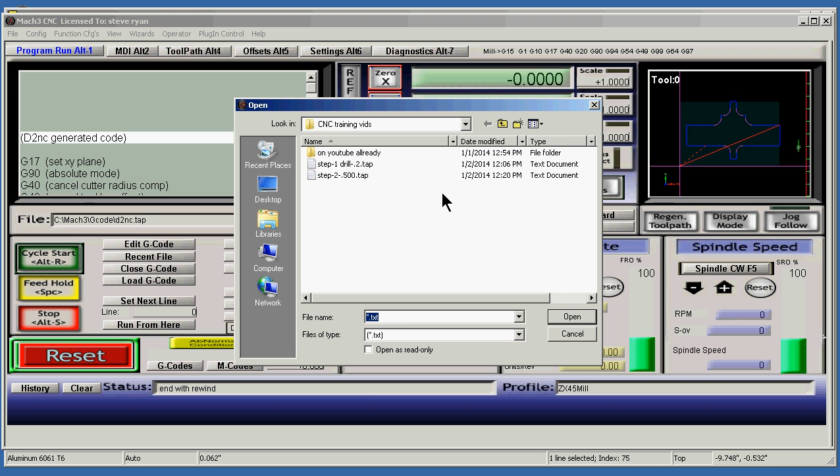Alright, I'm going to go ahead and cut this video short because of having sync problems and everything else. I'm going to check it over. If the sync and everything's okay, then I'm going to come back and continue with the next step of machining out the top of the part. Once we get all the steps for machining out the part, each step, then I'm going to come in and show you how to take each one of these files, cut, paste, copy, and edit them together so that it's one smooth process, just asking for tool changes. But right now I'm going to stop, and then we'll go from there.